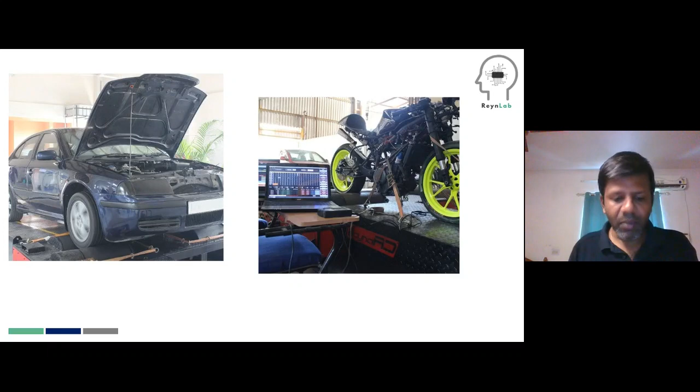And this is what we've been doing. I've been working with OEMs, motorsport teams, and back in 2016, 2015, I keep forgetting the dates, we started working with rally cars, and one of the first mainstream rally cars - I mean, we had worked with Esteems and Honda Cities, but that was pretty easy for us to do, there was not much work to be done with it.

But this particular car you see - that was the first year the Volkswagen Polo 1.6 was getting into rallying. That was when Volkswagen was exploring getting into rallying, and they were unfortunately not able to run a standalone ECU on these engines. Volkswagen was not supporting the tuning part of it, so it was aftermarket tuners, and none of them could ever make it work properly.

So we started working with this team called AR Racing, and we were taking care of the calibration side, the tuning part of things. That year, this car won the class - the 1600cc class. Though we started two races into it and had issues, it still managed to win the class.

The next year, by then we had quite a lot of working time with the client, this 1.6 Polo was consistently faster than the 2000cc cars. In fact, if you follow the rally scene, the car which was dominating, and is still dominating all these years, was the Mahindra XUV 500. This car used to separate the top runner and the second runner - the XUV 500s. Gaurav Gill used to be first, and then Arjun Rao in the 1.6 Polo. Imagine a front wheel drive 1.6 NA petrol just following the four wheel drive turbocharged diesel. That's kind of how this car was.

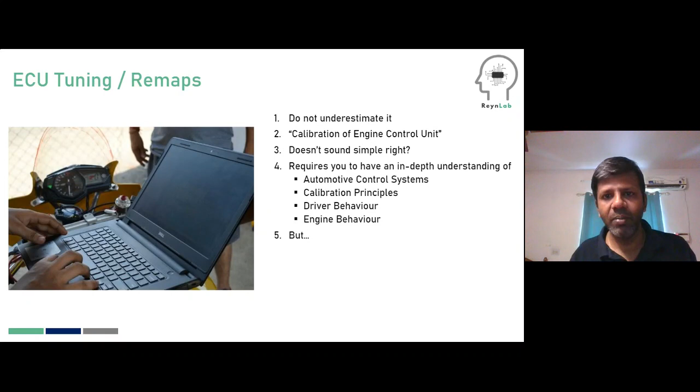There is so much you need to understand before you can start tuning ECUs, which is why you go onto YouTube and search for tuning fails, right? You have a huge compilation of videos of people who've blown up engines. So this is not something which is exactly very simple, but just because I've been doing it for quite a long time, almost like a donkey's years now, we've figured out an easy way of doing things.

So though it seems to be very difficult for you to learn, trust me, it is not exactly difficult. You can still learn it. It is not something which is, I would say, rocket science, right?

So now, before we move on, just a small question for you guys here. How many of you here still think that you need to have an engineering degree to start tuning? Right, quite a lot of people have this idea. Let me even go out on a limb and say it's a misconception. People have this misconception that you need to have an engineering degree to start tuning. So I would say that's not exactly true. You don't need to have an engineering degree to start tuning.

But if you are building something more advanced, like if you remember the first poll I posted, there was an option where you could go and build a career for yourself in OEMs. So if you're looking at building a career in OEMs, then yes, you need an engineering degree. And that degree can be in mechanical sciences, mechanical automotive production, or it can be in electronics, triple E, ECE, even CSIT, right? You just need a programming degree—I mean, programming knowledge, some kind of engineering background is what is needed if you want to get into OEMs. Now, if you're not worried about OEMs, if you're just looking at it as a standalone career opportunity, you want to set up your business, you want to improve your existing business, then you don't need an engineering degree.

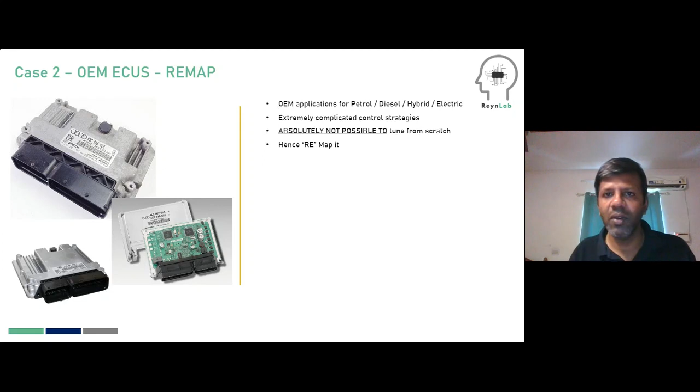Now if you remember, I said with the standalone ECU it's pretty straightforward to go and tune. So how exactly do you straightforward go and tune? Do you just do it with your computer, or do you need something else?

Second thing is a knock monitor. A knock monitor tells you when and where your engine is knocking. And the third important thing is to have, of course, a laptop and maybe some diagnostics. But the most important thing is to have a dyno facility to check.

Now why do you need a wideband O2? Why do you need a knock monitor? Why do you need a dyno to test it? Here is where things get interesting.

Now say you're tuning a petrol engine. There is a very small area between producing maximum power and knocking the engine and spoiling it. It's a very small area, especially with certain engines. Like say the Maruti G13BB, there's this big gap, you can kind of play around. You don't actually need a dyno, you can tune it without one. It's a pretty big gap.

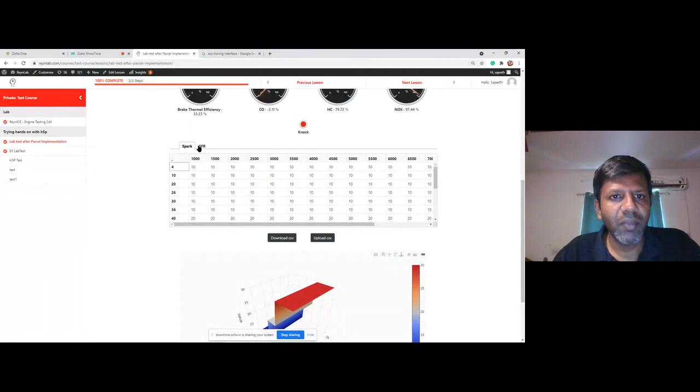So if you want it, you can search for ECU tuning interface or software, whatever it is. You have it here. These are the tables that you would see in any ECU tuning interface. You will have tables like this. So I've just tried to keep it simple, a table and a 3D graph. That's what I've done here. So I'm giving you a spark advance table, I'm giving you an air fuel ratio table. Air fuel ratios are here. And I'm also giving you a 3D graph which represents how this looks.

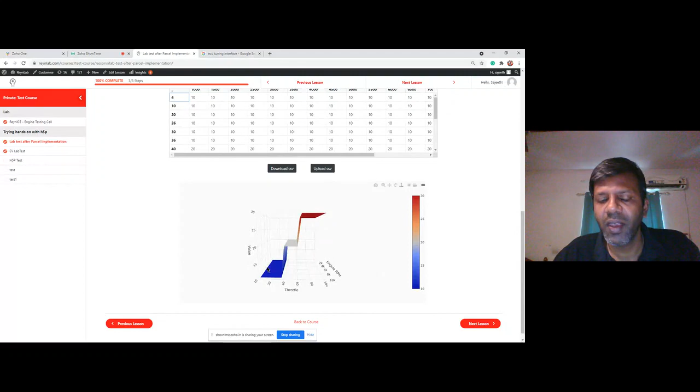You also have the option of doing this calibration in an Excel sheet and then putting it up, because sometimes working with Excel is easier. So this is engine RPM versus throttle position, and what is the spark advance value - a nice 3D graph to visualize things. Using this, you can learn how to tune, and as you tune, you can see how horsepower and torque are going up or down. You can visualize all of these things.

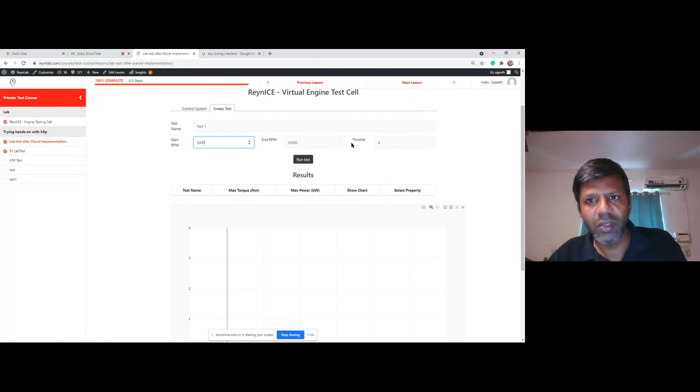Not just that, you can also run what is called a sweep test. Let me show you what this is. I'm going to do test one, from 3000 RPM at 100% throttle. Now I'm going to run test two, same 3000 RPM at 100% throttle. Now I can plot my horsepower and torque.

Does this seem familiar? The same graph which all your auto magazines publish, all the dynos. If you search for dyno graphs, this is basically what you will get. Now, this dyno graph is a result of you doing your tuning there, which means every time you do the tuning properly, this gets better and better, which means you don't spend 10,000 rupees an hour - you hardly spend anything. You just sit at home and keep tuning until you better the curves.

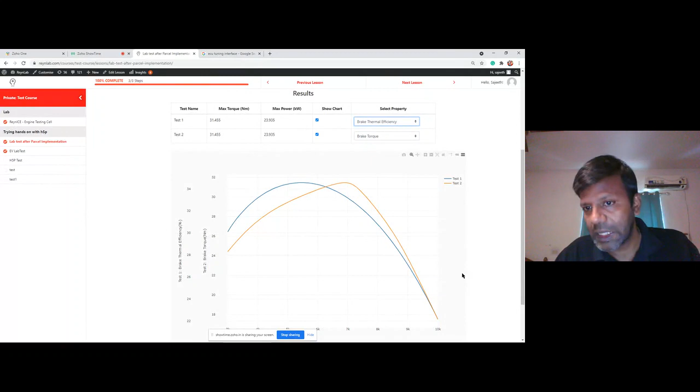Or if you're someone looking at going into the OEMs and working there, you can basically figure out what the brake torque depends on. Does the brake torque depend on FMEP, frictional mean effective pressure? Does it depend on brake thermal efficiency? Seems to be, because brake thermal efficiency and torque follow similar curves. But maybe if you took volumetric efficiency, then yes, it's even more closely related.

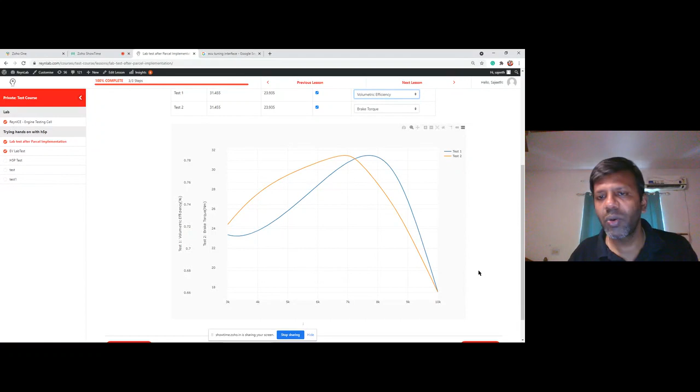So there's quite a lot of these kinds of things which you could do and learn from. Coming back to my original point, when you do the tuning course with us, this is exactly how you will learn.

Now, tell me if this would actually replace an engine and a dyno. I would say 100% definitely yes. We have done this for the last 3 years. We have offered this to students at BITS Pilani, the MTech students, who are industry professionals, and they've appreciated working on it.

Of course, as freshers, you would still need hands-on, but we'll offer that to you when you're able to come down. After the lockdown, you're always welcome to come down to our garage in Chennai, and we'll give you hands-on with all the tools. We'll usually have a couple of cars with us, so you can come and work on them. If you're lucky and it happens to be the racing season, you could come with us to the track in Chennai as well, and see how we tune at the track.

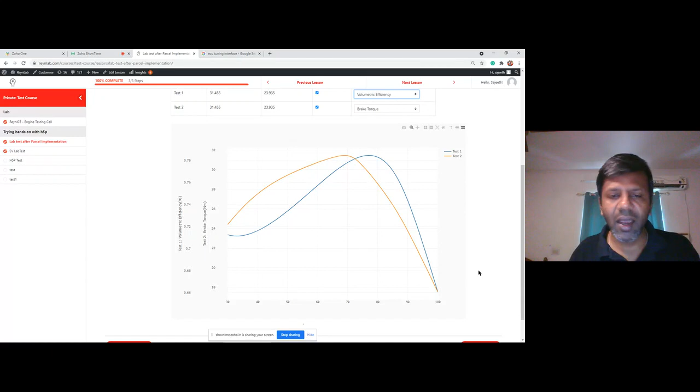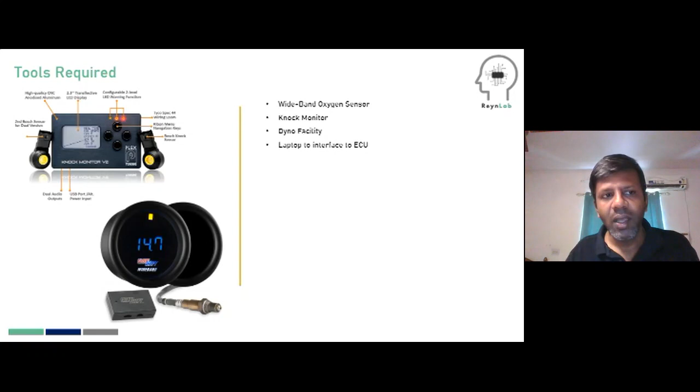So this is basically how we teach things, and how we add value to whatever you're learning with us. We help you learn without actually spending this 5-6 lakh rupees. And once you've done the learning and you're okay with it, if you think this is something which you like and want to pursue, then you could go purchase your own tools, and we do offer support for that as well.

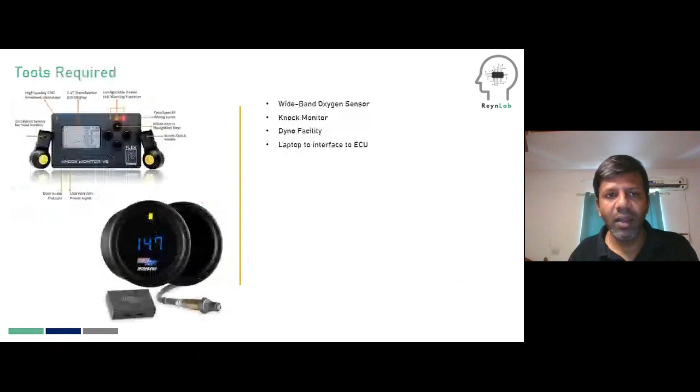Now remember, when we started talking about these cases, I said ECU tuning is relatively simpler, whereas this is a little complicated. So how do we tune a complicated ECU? You need to basically hack into the OEM ECU and extract the tuning file, which is why you need certain specialized remap tools and other things. But once you get the specialized tools, then basically everything else is the same.

Once you have done that, of course, there are various tools - KTAG, CMD, PCM Flash. We use quite a lot of these tools, and you will get hands-on with them as well when you come down. But basically, this is something you could also learn by coming down, or we'll have separate video sessions for how to use these remap tools.

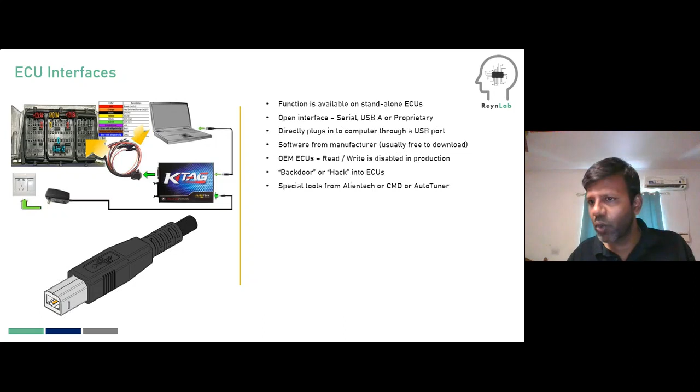So once you're done with it, you can decide if you want to do it on your own. Once you get the file out, tuning becomes easier—you just go and straight away tune it and you're done with it. Now, what is the tuning process?

With a standalone ECU, you just connect, read the file, tune it—alter it on your computer—and write it. Whereas with an OEM ECU, you gain access to the ECU first, which is hacking into it, and then extract the hex file. It's all in hexadecimals, since it's a low level system. You convert the hexadecimal into something you are able to understand.

Then you tune it, then follow the reverse process. The format you understand, you convert it back into hexadecimal. You do something called a checksum, which is a security algorithm, and then you write the hex file into the ECU. So the process of tuning, whether it's for standalones or OEMs, is kind of the same—absolutely the same. Only the read-write process is different, which we will cover during the course as well.

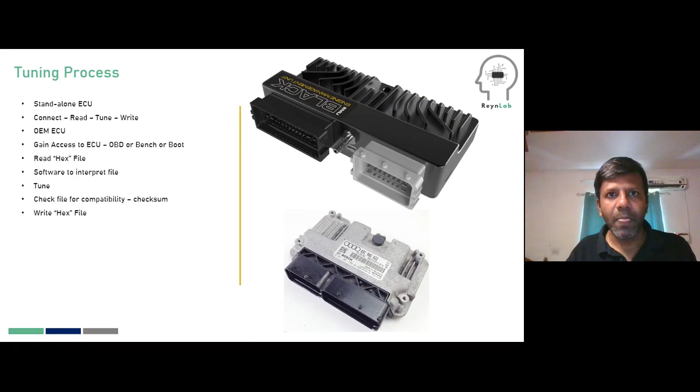So that's the tuning process. Now, what can you expect to do after learning to do the tuning? There are two different ways you could go. The first is the aftermarket career track. Aftermarket is getting into business on your own, all motorsports—you're a mechanic, you want to learn to tune more advanced cars. All of those things, diagnostics, goes into the aftermarket track.

Whereas the career track two would be for OEMs. If you want to go work with OEMs, this course forms the fundamentals to get into those things. With just engine calibration alone you cannot get into OEMs—you can, but the chances are very less. But this forms the fundamentals, because any automotive OEM will expect you to understand automotive electronics, automotive mechatronics, what exactly an ECU is, what the control strategy is—whatever basic qualification they need will come from this.

Some extra skill sets—model based development, V&V, vehicle integration—all of those we have separate courses which will cater to. So that's about the career paths which you guys can take.

Now, I did promise that I will also teach you how you can learn tuning on your own, so now we are moving into the second part. But before we move into it, let me take a quick 5 minutes to look at the questions and chat messages, and then I'll get back to you.

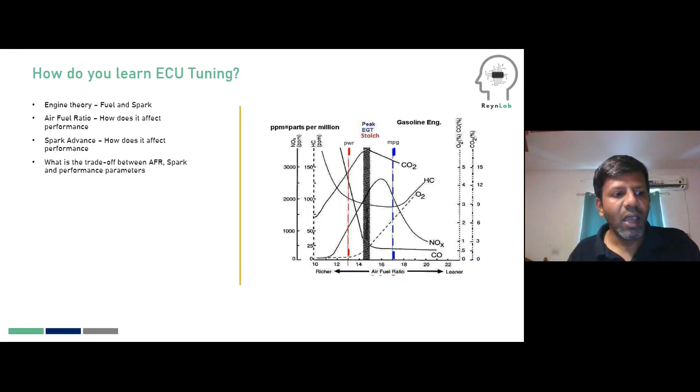You have the virtual dyno. Virtual dyno is available for you, free to use for a period of 4 days, I guess, after which you can register for one more account and continue doing that.

So once you have done this, once you have learned the basics, then what do you do? You get into the head of a driver. You basically become something like a psychologist, and you try to understand what the driver requirements are. Trust me, it is important, because every single driver drives in a different way, and he will expect the car to be tuned to suit him. So unless you get into his head and understand what this guy is wanting, you cannot tune the ECU as per him. So that's what we call understanding driver requirements.

You do that and understand how you could translate these driver requirements into ECU tuning parameters. Because the ECU tuning parameters, end of the day, you can only play with fuel, you can only play with spark. How do you play with these two things and satisfy different drivers? That's the name of the game. That's what we call converting the requirements into ECU tuning parameters.

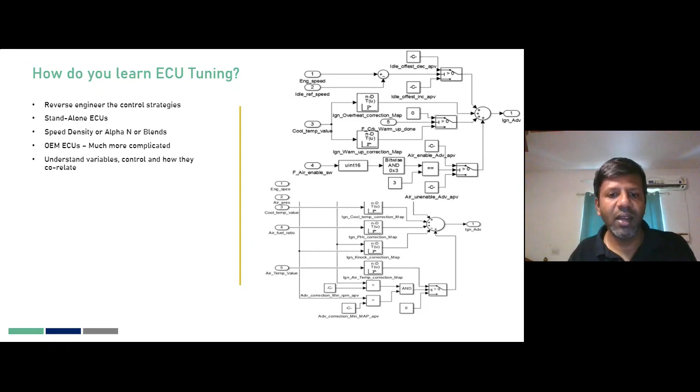So you do that, figure out what the control variables are, how they are related, and once you've got that understanding, then it becomes easy for you to move into the next part of it. So then what you are able to do is open up any ECU, take up a control module like this, take up the tuning tables, and you start basically working on it.

So like I said, what we teach is not specific to a particular ECU or a car. I don't say I'm going to teach you how to tune a Nissan SR20 DET using maybe an ECUMaster EMU Black Series.

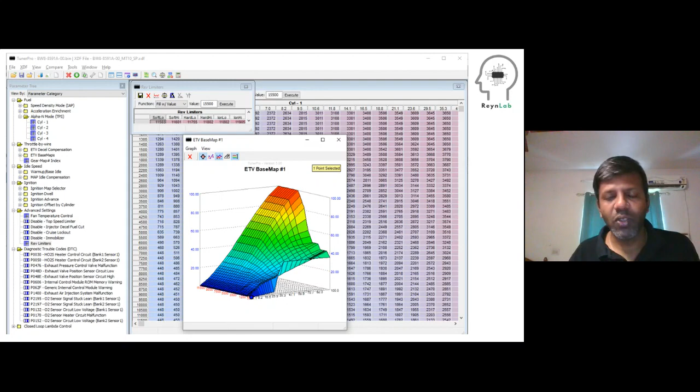No, I don't do that. What I teach you is the fundamentals of how any engine, petrol or diesel, turbocharged or non-turbocharged, can be controlled. So you don't come back to me for multiple courses every time you want to do a new engine. You learn the fundamentals, build up on them, become really good at it, and apply them to any vehicle, car or bike, on any particular issue. That's what our program focuses on. We don't focus on application-specific items, we focus more on the fundamentals.

Coming back to it again, once you have your virtual dyno to learn, what we manage to teach you is how you interface to the ECU, what is the tuning process, how do you reverse engineer the hex files, what do you need to reverse engineer the hex files, and quite a lot about control strategies as well.

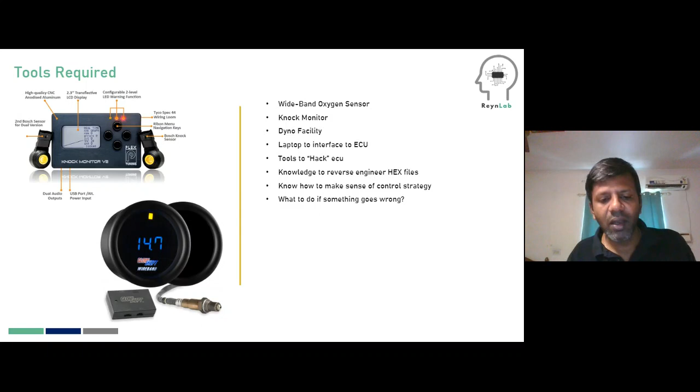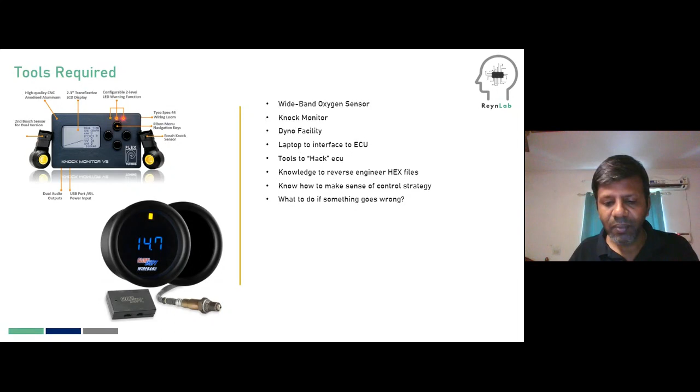Most importantly, what do you do if something goes wrong? That is not something a lot of people cover, so we take a lot of pains to cover what to do in case something goes wrong. We also support you once you've completed the course, just to ensure you don't go out into the field and mess things up, blow up an engine. We don't want that to happen - it's bad for us, it's bad for you. So we try to make sure you don't do anything of that sort.

So how are we going to teach? This is about our program. I think I've already spoken about what we're going to teach, the virtual dyno and things like that. What are the things we teach? Apart from petrol engines and ECU tuning...

What we also teach is, we cover quite a lot on diesel theory - how is petrol different from diesel, how do you control diesel engines. We do that. Then we cover OEM control strategies, so whatever control strategies, the diagrams and things I showed, we cover all of those things.

Most importantly, for those wanting to get into the aftermarket, we get into performance modifications - how do you design an intake, how do you design an exhaust, what is a cam, how do you select a cam. Most people think if you put a race cam you gain more power - is that true, or is it something else? We cover all of those things.

We also teach you how to turbocharge a naturally aspirated vehicle. So if you have a car or bike without a turbocharger, if it's naturally aspirated, we help you understand how you could build a turbocharger for this system and how you could install it.

And of course, we cover ECU remap tools as well. In case you want to start your own tuning business, we could help you with what kind of remap tool to purchase, where to purchase it from, how to set up your business, and what amount of investment you need. That brings me to the end of my presentation about ECU tuning and remaps.